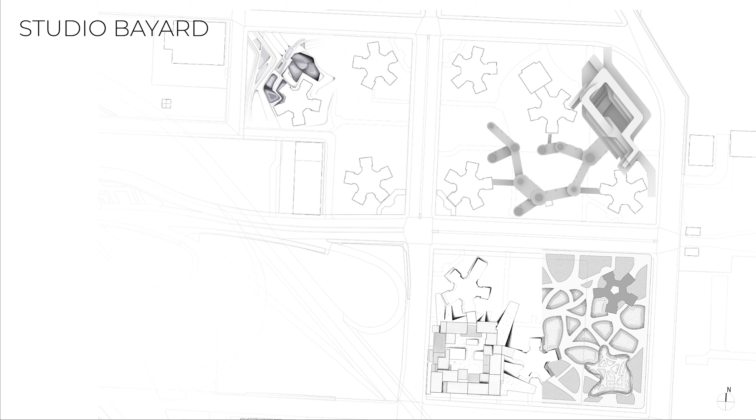Currently, there is a disjunction between the existing Farragut towers and the landscape. The intent is to design a housing project that blurs the boundary between the two and connects not only to the other Farragut towers, but to neighboring communities.

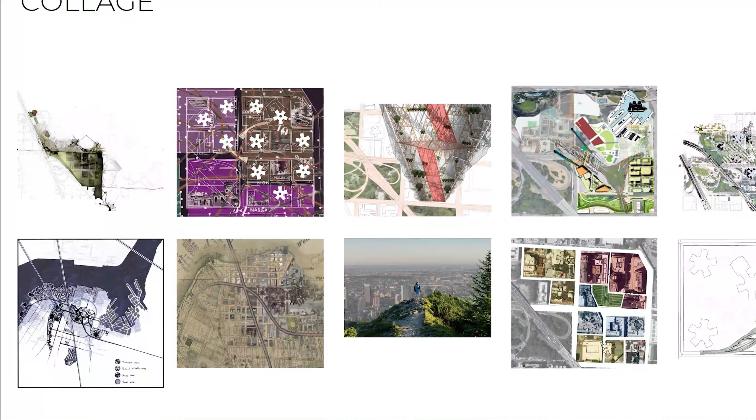We initially started by individually creating a map collage to analyze and introduce intermediate scales. Some groups used their collage to bridge the connection between the Farragut houses and the neighboring communities, while others uncovered historical facts that influenced their design.

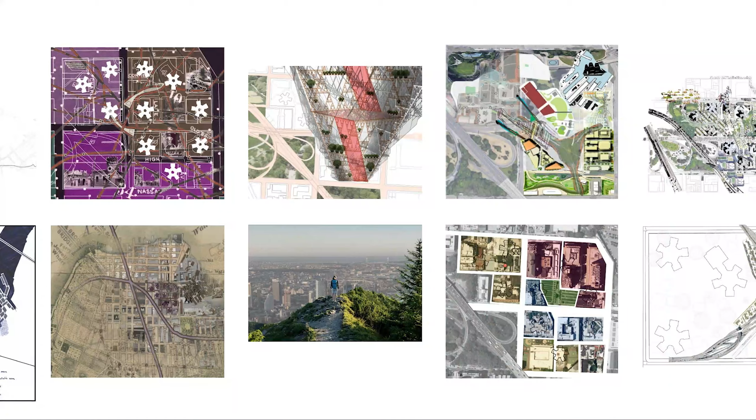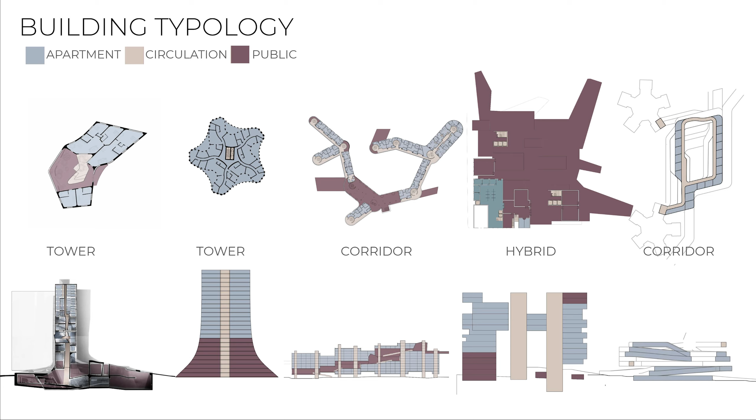Overall, our projects have a wide range of typologies, programmatic organization, public and private separations, unit layouts, and connections to the existing Farragut houses. The typologies of the projects in our studio varied greatly between having vertical and horizontal expansions, central and dispersed cores, as well as single-loaded and double-loaded corridors.

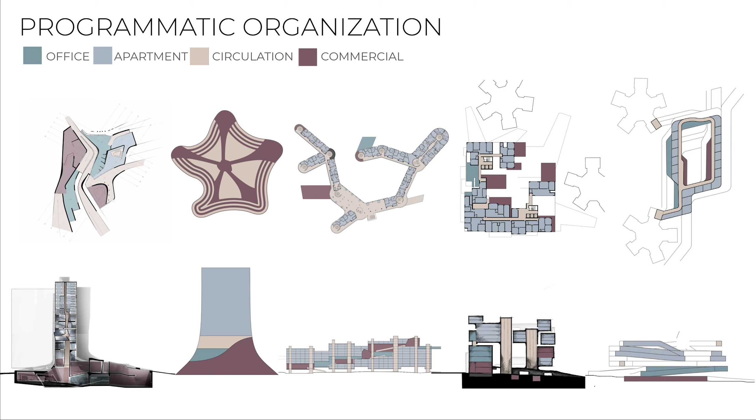Interestingly, some projects in our studio focused on blurring the boundaries between different programmatic elements to create opportunities for diverse groups of people to interact.

That being said, many projects in our studio seem to follow a more typical system of programmatic organization by having commercial space at the base, followed by office spaces and residential areas.

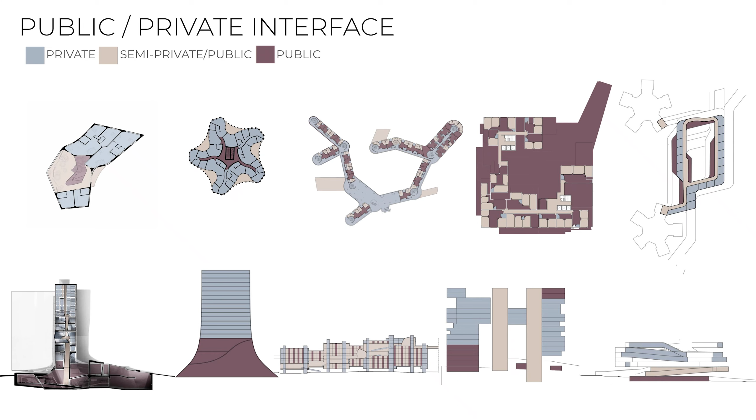Some projects have more definitive boundaries between public and private spaces, while others attempted to create a more blended program to allow for more interface between residents and other members of the community.

Many projects in our studio physically collide or merge with the Farragut houses, while others attempt to establish a more visual or symbolic connection between the existing buildings and the greater site.

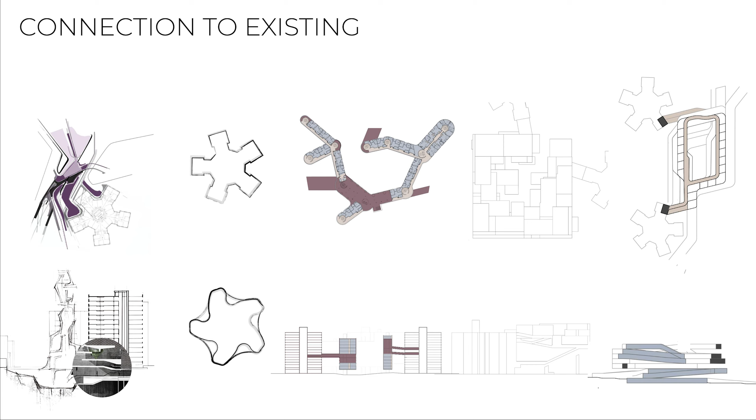Zooming in more specifically into the individual unit types, a variety of our class projects wanted to maximize the amount of natural sunlight received by each apartment unit.

Additionally, some plans follow a more strict organizational system by having standardized unit layouts, which repeat and rotate throughout the building, while others have more irregular systems with units which are unique to each floor.

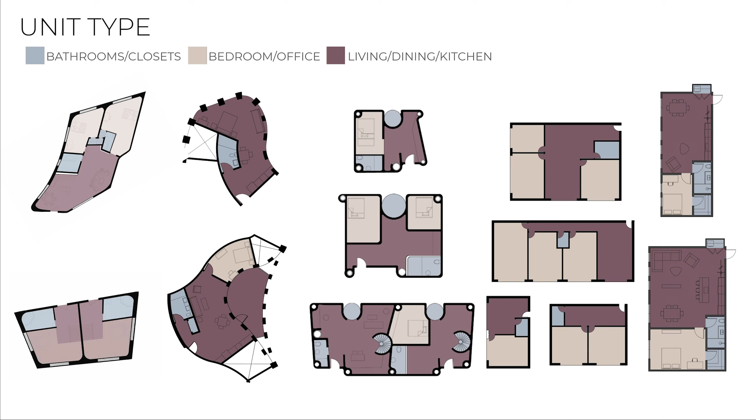Generally, throughout each project, there is an emphasis on maximizing the amount of space within each apartment, but still allowing for open common spaces. Honing in on each individual project, Nicole and I would like to start off by presenting

to you our proposal to design a housing project that reconfigures the landscape, redefines community and education through greenhouses and biological labs, reshapes the connection to the nearby Farragut Tower, and overall, through the use of landscape, blurs the boundaries between different communities in order to bring people together.

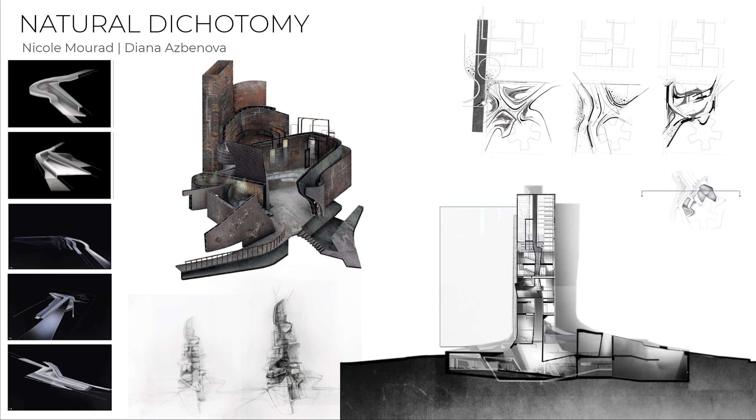There's an interesting juxtaposition to be analyzed between inside and outside, individual and society, private and public, the natural world, and the urban environment. Our concept focuses on natural versus unnatural elements and how the interweaving of these components influences the fabric of the communities.

This next project is by Audrey Tuck and Andrew Mickelson. Boolklyn Tower derives originating massing and programmatic initiative from organic forms and agricultural land use occurring on the site through the majority of its history.

This form was then arrayed to reflect the pentagonal organization of units and circulation in each Farragut house. The subterranean base contains a vertical farm which extends up through the ground level lobby and second level co-working space to transition to a resident amenity floor and subsequent residences.

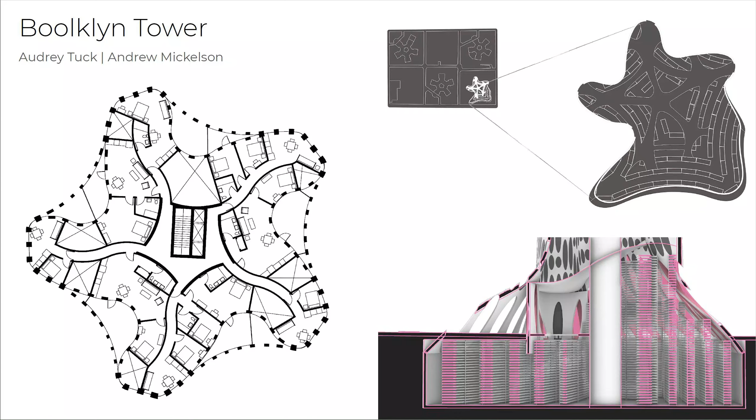The organization of units within the tower is controlled by a parametric fenestration system, also derived from the original forms of the landscape. This system arrays 1- and 2-story openings according to a pattern allowing for effective layout and daylighting of studio to 3-bedroom units.

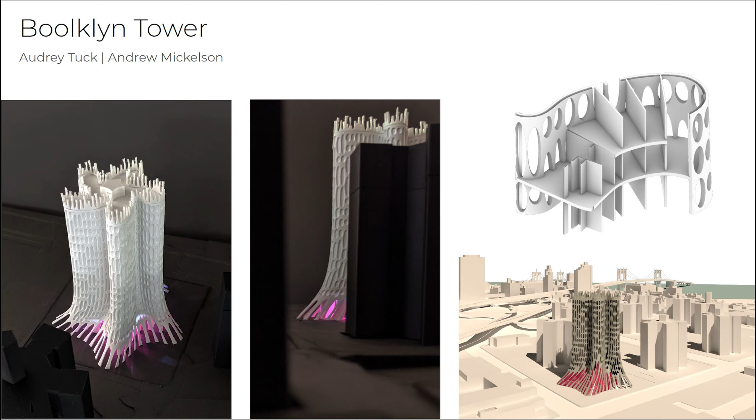This next project is by Juyeon Park and Tamar Salinger. The project acts as an extension to the Farragut housing, a horizontal and elevated system which spreads between the existing trees, connects to the Farragut housing, and offers public spaces and a new type of dense living.

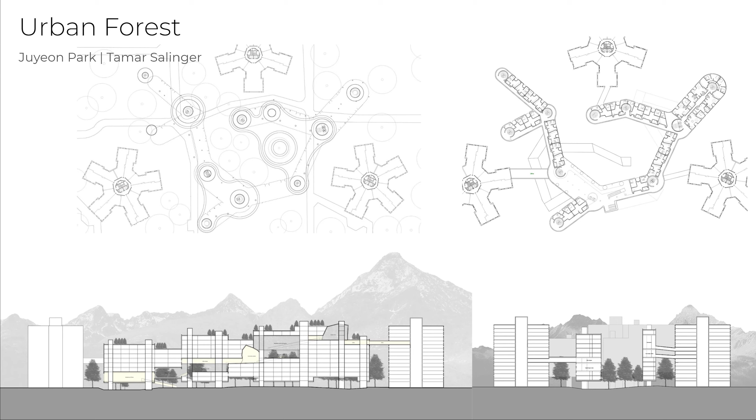In response to the climate change disruptions and catastrophes, the initial point of the project is to allow the greenery and trees of the site to be a safe zone in times of flooding, and the mass is spread in between the existing trees and greenery of the site.

Through an idea of a trail, public and private programs are integrated into the residential functions, connecting the entire building for both the residents and the local neighborhood.

The spreading and elevated massing of the housing is achieved through vertical elements of structure, infrastructure, cores, and greenery which connect the residential system.

This next project is by Arif Khan and Qingsong Wang. The project is inspired by the urban fabric of the site, absorbing the site into the intersection of scale, context, and program where it lies.

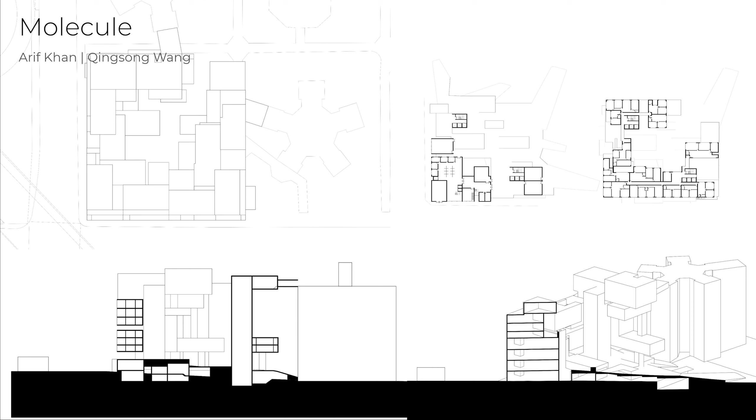A framework of homogeneous forms interact together, creating unity and division. A binary circulation program creates a programmatic hierarchy and defines the public and private spaces. It creates a network connecting the open spaces and different zones of the building.

The next project is by Danielle Pelletier and Dana Saari. The objective of this project is to restore the relationship with water that the Farragut residents once shared with the East River prior to the high-end residential developments in Dumbo.

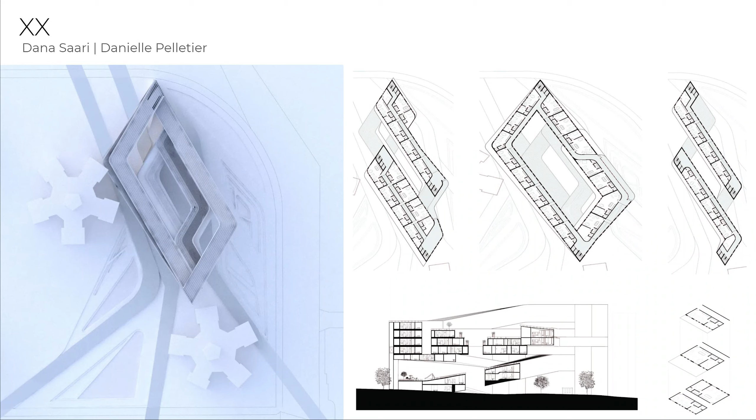Rather than building around climate change, which implicates that the flood risk on our site will significantly increase within the next 60 years, we wanted a design that would alleviate flood risk and even celebrate rainwater.

Not dissimilar to rain gardens, the building absorbs water through natural green space and redirects its flow, which intertwines and engages with the flow of pedestrians all the way from the site to the building.